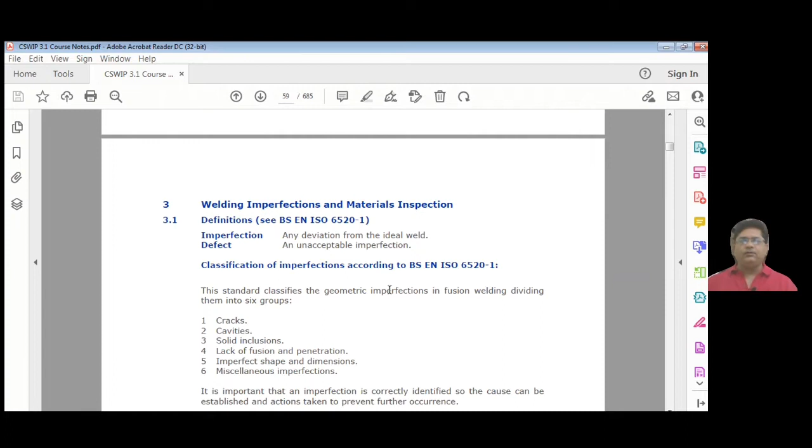A defect is any unacceptable imperfection. So you will be talking in terms of imperfections and defects. You will come to your boss or supervisor or QC engineer and say, I saw a defect and I need to do inspection more closely, can you help me? As soon as you say defect, he will understand you are talking about an unacceptable imperfection. So in your mind, and in your report, you already know what you're talking about when discussing this with your senior or the welder.

So try to be as technical as possible, because we are learning this so it will help in our career and wherever we work. Classifications of imperfections as per 6520-1 exist because all imperfections cannot be the same. There are different kinds of imperfections and defects, as you will see as we go through this chapter, and how detailed it is. These include cracks and cavities.

Cavities are basically voids. Inside, when you encounter an object and start cutting it, you can see there are many gas pockets or something like that. These cavities are like a tooth cavity, meaning there is a hole inside. That explanation is in general English.

Solid inclusion is something which is inside the item, embedded. You can understand it like seeds inside an apple — they are the solid inclusion. If you understand the apple as a metallic object, then the seed is the solid inclusion.

Then lack of fusion and penetration. When welding is happening, if the fusion of the welding joint is not done properly, you will see a straight line, or part of the bevel or steel not melted properly — that is a lack of fusion and penetration. Penetration problems occur when the root is not penetrated properly, generally on the root side.

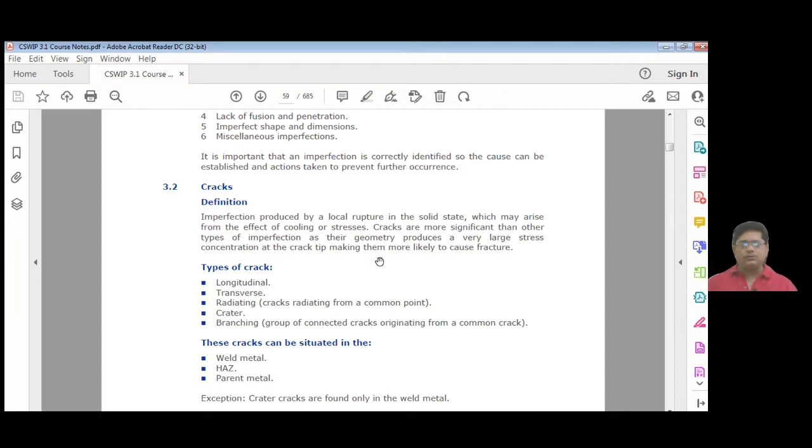So there are types of cracks: longitudinal cracks, transverse cracks. When we talk about longitudinal and transverse, we are talking relative to the welding joint - longitudinal to the welding joint, transverse to the welding joint - and radiating cracks, radiating from a common point.

There will be one point where the stress is so high that the crack started from there, which we call the initiation point. From there you can see branches going out. If the grain boundaries are affected on all sides or one side, then the crack starts from the grain boundary and you will see it branch.

Then there's crater crack, which you can see if you are not doing proper welding. Then branching - as I said, the branches are like tree branches connected to the crack - and usually we do many things to repair such cracks.

So let's try to cover these in our topic. These cracks usually happen from the weld metal. That's why I said longitudinal to the weld metal, longitudinal to the HAZ, and longitudinal to the parent material, or transverse to these three.

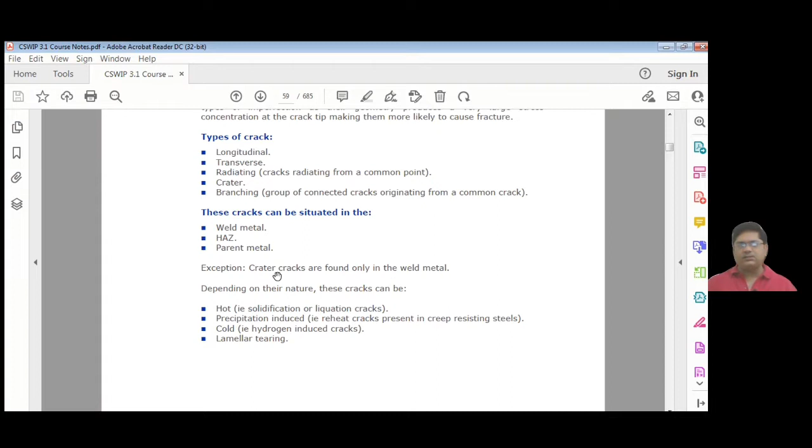Okay, but then let's proceed. Exception: crater cracks are found only in the weld metal. Naturally, crater crack is a problem of welding, so naturally it will come from the welding material itself, I mean the welding joint itself.

So depending on the nature, the cracks are either hot - which we call solidification or liquation cracks - or precipitation induced, that is reheat cracks present in creep resistant steels. So in creep resistant steel, we will find the precipitation induced cracks.

And also we'll find cold cracks, which are hydrogen induced cracks. For example, we have done the welding and the welding is done in a hydrogen rich atmosphere. Then you will see, after 48 hours or after 24 hours, hydrogen is actually escaping from the joint and getting trapped somewhere, and that causes a cold crack.

Then you have lamellar tearing, which I explained needs lamination checks to identify. Lamellar tearing defects are embedded in the steel during rolling, so when you are doing the cutting, you cannot see them - they may be a little bit inside. But when you put a joint and start to weld, this tearing will delaminate from the steel, and it will cause a crack because of the stress involved in the joint.

Let's see one by one, so that we will understand these concepts very clearly. Depending on the location and mode of occurrence, hot cracks can be solidification cracks, occurring in the weld metal, usually along the center line of the weld, as a result of the solidification process. One example is shown here.

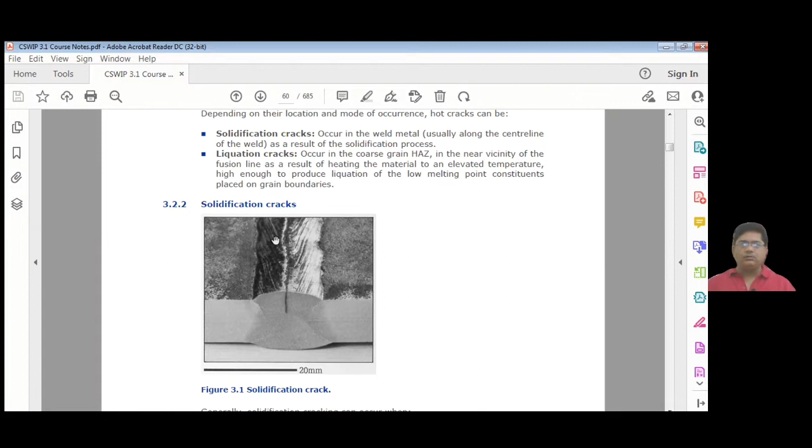You need to imagine and observe this carefully, because let's say for example you're not going to the site and you have not seen this. Usually it can be seen, but if you have not seen this, at least when viewed in the radiograph, probably you can identify it. These are also very tight cracks - many radiographs will miss this, but UT for sure will catch it very properly.

So solidification cracks occur during the process of welding as a result of the joint configuration, stresses, or improper welding technique.

The liquation cracks occur in the coarse grain. So when you talk about liquation cracks, these usually occur in the grain boundaries of the HAZ area. So you will see something in the HAZ area that will not be a solidification crack, but will be a liquation crack. Liquation cracks happen when welding is occurring, the grain boundaries are stressed, and if there is any problem there, it can simply start cracking from there as well.

Those are the things an inspector usually studies in CSWIP before coming to the site. Along the way, you may not encounter this because if the site is very big, something may have happened somewhere. If something like this happens, a QC inspector is supposed to be very inquisitive - asking his supervisor why it happened, how the repair was done, and what the root causes were. You need to go into very deep detail, because it may happen on your site under you, so at that time you need to know exactly how it was rectified and all that.

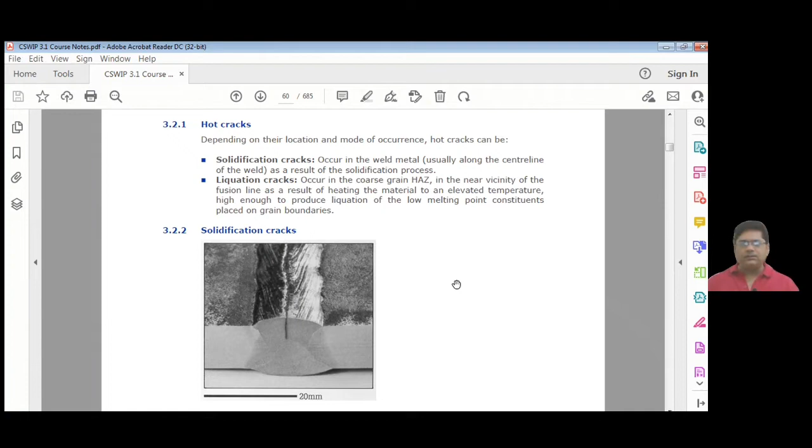Usually it will not happen in steel. I've rarely seen this happening in new building, but it may happen, and that's the reason it is given here as one of the causes of crack.

Generally, solidification cracks can occur when weld metal has high carbon or impurities like sulfur content. So, for example, you're doing welding with higher carbon content in an impure environment. The environment where the fit up is made is not good, because maybe the fit up is made in a large vessel, usually happening deep down in tanks or places where it's very difficult to maintain cleanliness and everything.

So in such cases, usually in workshops, it may not happen because the workshop environment is usually very clean, and such impurities like sulfur and all won't cause you any problem.

Then, as I said, depth to width ratio of the solidifying weld is too large, deep and narrow. So if the width of the joint is too wide with respect to its depth, or sometimes the depth is too much with respect to the width, that can also cause the problem.

Because many times these kinds of problems, the engineering and welding engineer will try to fix during the drawing stage itself. So depending on the thickness, the depth to width ratio of the joint, when the welding engineer goes through the drawing, he will usually identify this as a problem if we want to weld with SMAW, GTAW, FCAW, or SAW. So he will usually tell engineering to keep that kind of joint width ratio.

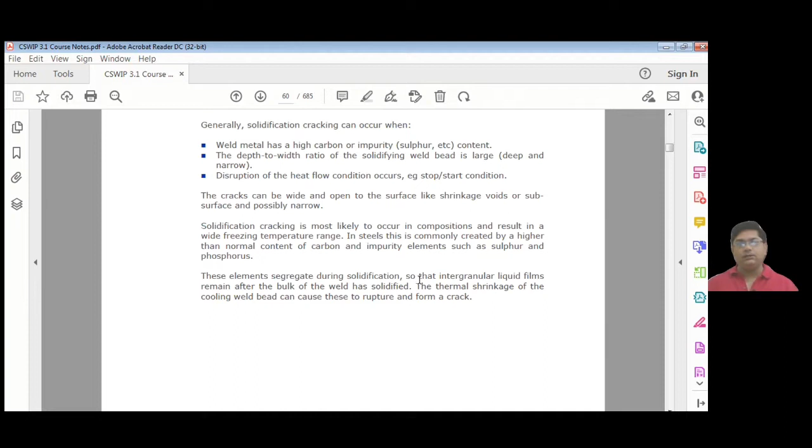There is a wide range of applications for S420, S690, and beyond. Usually jacket legs, the jack-up rig legs, are made of 690 material, and this is very high technology, highly mature, and advanced welding. Maybe someday I will try to cover that in a different topic.

So you can see a diagram of solidification cracking here. A sulfur-enriched liquid film forms in the center because when the whole weld is in the molten phase, the sides, being cooler areas, start cooling first. Both this side and the bottom side start cooling first, while in the center the molten layer is still there and cools last.

So if you have impurities, what happens? These impurities get pushed from the side boundaries to wherever it is still molten. The impurities hang around the molten area and get pushed because they are not getting solidified. Once pushed, usually from both sides, they accumulate in the center.

Then solidification happens, and if you just grind a little bit, you will see that this is already there as an impurity and crack. You can also catch it, though rarely, in the radiography film, but you will still see it because the impurities show up in the film, and then there will be a line, so you can easily identify this.

So any QC inspector should not try to ignore it if there is some crack or something that happened at the site. It rarely happens, and not all inspectors are involved, but at least they should know what kind of crack it is.

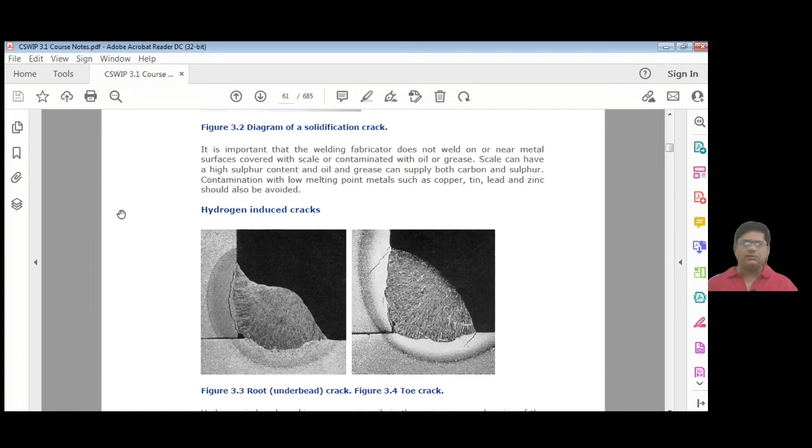So you can see the hydrogen induced crack has happened here in the heat affected zone, and here it has happened in the heat affected zone as well, because of the stress involved, since both sides are pulling. Naturally this side also is showing a little bit. It's a typical fillet joint, if I'm not wrong, because there is a gap here.

Many times the gap is very small, and that's the reason the stresses involved become higher, and then there is a problem. So for the fillet joint to be proper, there are minimum gap requirements given in the code. For example, DNV will say it should be at least 1.5 to 2 mm, to take care of the stresses involved in the fillet joint.

Then there is a fillet joint welded from a thicker member to a thinner member. So one has to understand that as well.

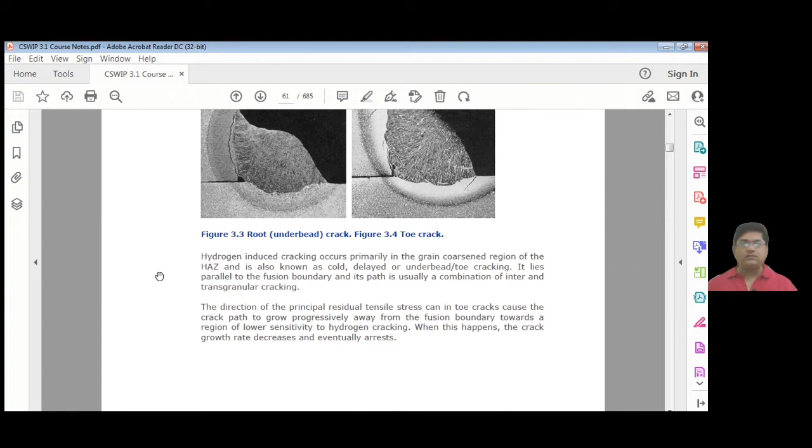Hydrogen induced crack occurs primarily in the grain coarsened region of the heat affected zone. So one of the deadliest cracking mechanisms identified in our industry is hydrogen induced cracking.

If you have time, go to YouTube and search hydrogen crack experiment. You will find a video where the person welds different kinds of electrodes, like 6010, which is high in hydrogen, then low hydrogen like 7016, 7018, and other cellulosic coated electrodes on small specimens, then keeps them in mineral oil for at least 1 to 2 days. In that video you can see how the hydrogen gas escapes from the weld joint. It's very exciting to watch, and I don't know if because of copyright issues I can show it in this video, but I'll try to find some video and post it along with this one. I think people should do their own search, not depend on others to spoon feed them, because it's a very exciting topic.

So there you can see how even lower hydrogen electrodes still give out hydrogen. It doesn't mean that low hydrogen means there will be no gas escape at all. Hydrogen will be there and it will escape. The only thing is how you manage this properly, by giving proper heat and not suddenly cooling it, so as to allow the hydrogen to escape from the weld.

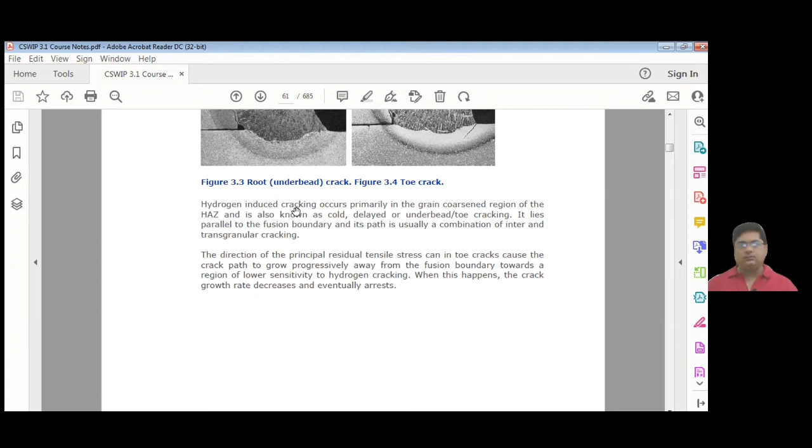So delayed underbead toe cracking lies parallel to the fusion boundary, and its path is usually a combination of inter and transgranular cracking. The grain size from the colder region and the grain from the hotter region of the HAZ, if these grain boundaries are of different sizes and not aligned to each other in a soft fashion, obviously there will be stresses involved, and it will start from the bigger grain size boundary.

Because why are they saying bigger boundaries? Imagine you have a lot of footballs and a lot of golf balls. The golf balls go below the football and you cannot see them, right? But in between four footballs, if you put one golf ball or a table tennis ball, it easily fits there and gets stuck. It will not be able to escape.

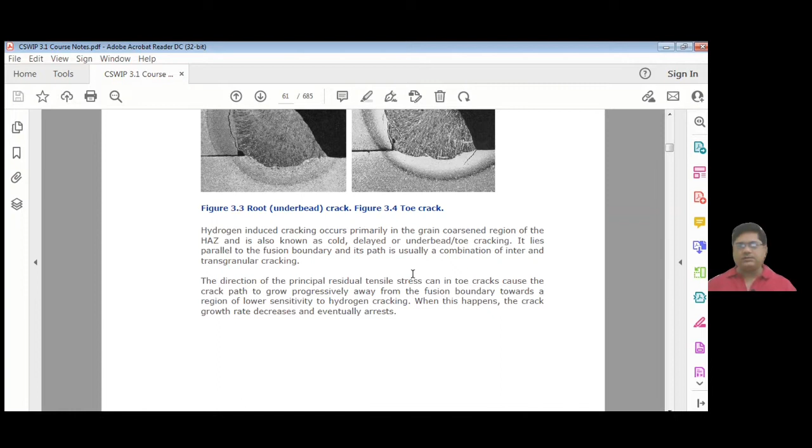The direction of the principal residual tensile stress can cause the crack path to grow progressively away from the fusion boundary towards regions of lower sensitivity to hydrogen cracking. So from where it is entrapped, it tries to escape through the less sensitive area. When this happens, the crack growth rate decreases and eventually arrests. He's explaining the conditions under which hydrogen will escape without getting stuck somewhere.

So the 4 factors necessary to cause hydrogen cracking are: the hydrogen levels. Primarily your electrode - if you are using a higher hydrogen electrode for some reason, you need to understand that your electrode has high hydrogen content, and you need to properly give the preheat and post heat so that it will be removed.

Usually we are using very low hydrogen electrodes - 4 ml per 100 gram electrode. For 7016 we are using -1, which is 4 ml I think, if I'm not wrong. It's very low, so the chances of hydrogen coming from the electrode are very minimized.

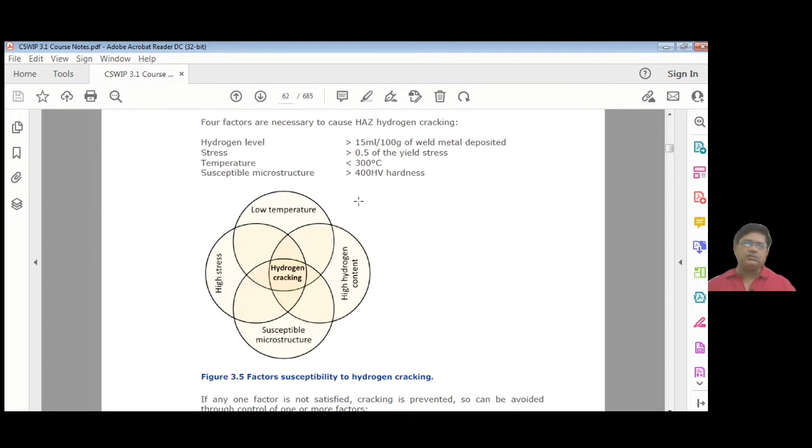So you can see this when temperature, stress, susceptible microstructure, and also the hydrogen content all come together, you will have a very high chance of hydrogen cracking.

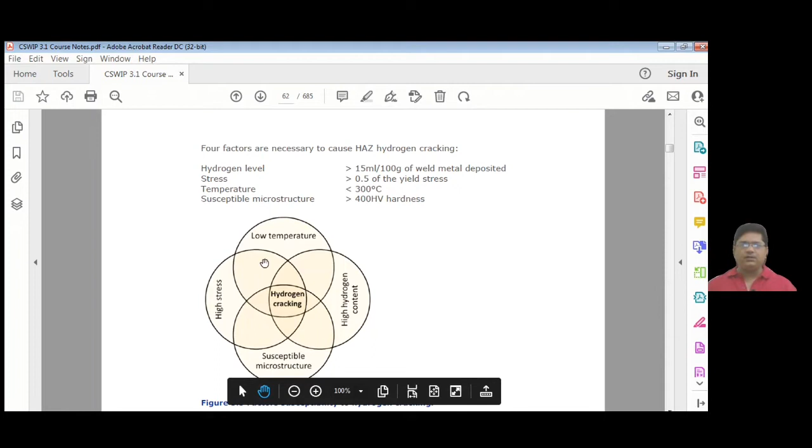Let's move from here. I think you should take this, cut it out, put it in different colors, and put the hydrogen in red color, and then put it on the notice board for everybody to know. Because otherwise, this material which we are studying will remain in these books, and if it is not coming out, it will not help the welder, fabricator, welding foreman, welding supervisor to understand these concepts. If they understand this better than you, then you are not required. So our whole life should be engaged in enriching the knowledge of welder, fabricator, foreman, so that if they know the dangers, the QC inspector's life will become much easier.

So if one factor is not satisfied, cracking is prevented, and that can be avoided through control of one or more factors. Apply preheat, slow down the cooling rate, and thus avoid the formation of susceptible microstructure.

So preheat, post-heat is required wherever it is needed. Usually you will not decide this, the welding engineer will decide that, and then you have to just implement the WPS. You have to see that it is done or not at the site. Welding inspector is not making any kind of decisions of this nature. It comes from the welding engineer, because he's a technologist. He will study the technology, he knows the material, he knows the metallurgy, and then he will build the WPS. And for that, he knows where the preheat is required, where it is not required.

So an alert QC inspector can read all this and read the mind of the welding engineer, so he knows what the welding engineer really wants him to do at site. Think about it like this, and it will be easier for you. Even though the QC inspector may be a BE engineer himself, in BE engineering they are not teaching you that kind of deep concepts of welding. This is usually done in a different kind of course where the welding engineer learns this and implements it. Welding engineer course itself is completely different from BE engineer. So a BE engineer should not think that because I am a mechanical engineer I can understand all these concepts easily. No, welding metallurgy is a different subject. Don't try to play with welding metallurgy yourself, and always try to implement the WPS. That is what is required from the welding QC inspector.

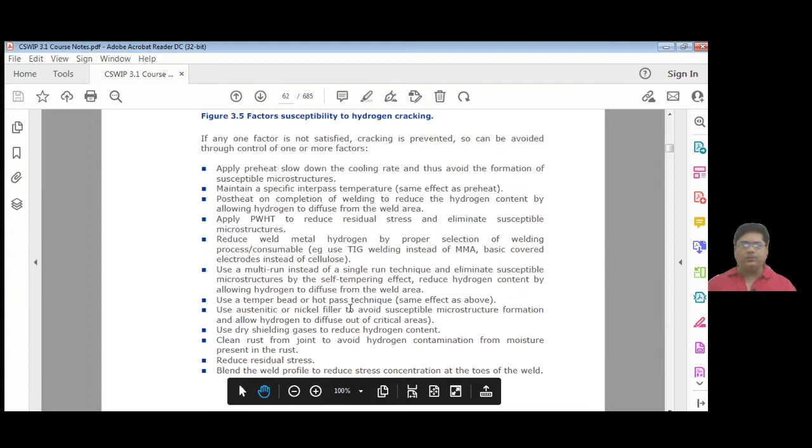Then use a temper bead or a hot pass technique, that's what I had said. Temper bead or hot pass technique - these kinds of welding techniques will help reduce the problem.

Then use austenitic or nickel filler to avoid susceptible microstructure formation and allow hydrogen to diffuse out of critical areas. So this is also decided by the welding engineer, what kind of filler material is to be used, and it's made part of the WPS. Then use dry shielding gases to reduce hydrogen content.

So when the gas is given, you need to always check the moisture content in the gas, the purity, and the material certificate of the gas - you must check.

So clean rust from the joint to avoid hydrogen contamination from moisture present in the rust. Rust is a very bad place - for example, there is a joint which is fit up, and 4 or 5 days there is no welding, and during that time if it's a raining kind of environment, then naturally there will be rust formed in that joint.

Then that rust, sometimes you can see the rust in the form of a red color bloom, and many times you may not see it, but there is such rust which is very, very difficult to see because it has just formed in 1 or 2 days only.

So you must insist that once the fit up is released, welding should start immediately. Or if you want to give 3 days, 4 days, 5 days, then the welder must clean the joint and re-show it to the QC inspector, then he should start the welding.

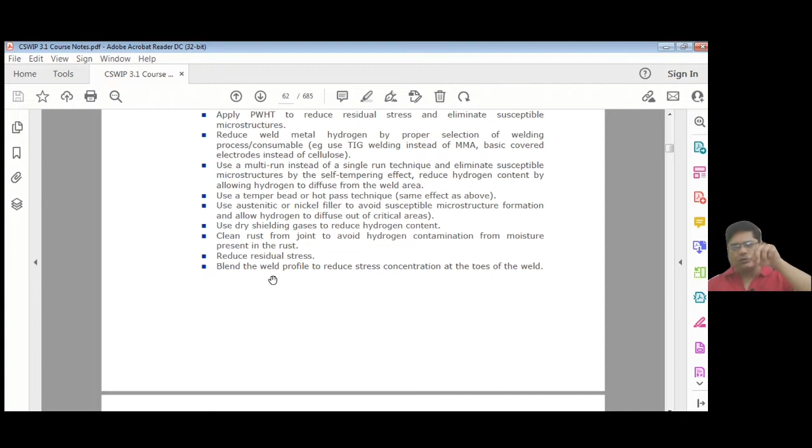And then we are using a 25 paise coin or 1 rupee coin to check the toe blending, or even you can use the washer of the stud and nut. That washer also is circular, so you can use that and see how smooth the toe blending is.

Lamellar tearing, as I explained, when in the joint lamellar tearing can happen, there if you do lamination first, then do the joint, you can avoid that. So lamellar tearing can occur on the rolled steel products primarily plates.

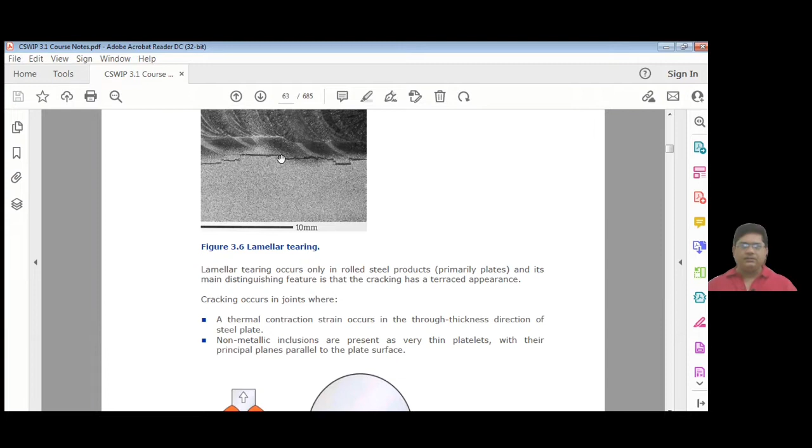So cracking occurs in the joint where the thermal contraction strain occurs in the through thickness direction of the steel plate. This is why in many places where jacket construction is done, critical structures, Z grade material is used.

Z grade material means when rolling is happening in the thickness direction, the plate is already tested in that direction. For Z grade testing, you can send any specimen, mentioning the rolling direction, to the lab. They will do the pull test to identify if the material is sound or not, and if not sound they will tell you it has failed. So you need to do UT and confirm there are no inclusions in this material.

The diagram of lamellar tearing shows contraction strain imposed on the planar non-metallic inclusion results in progressive decohesion to form the roughly rectangular holes, which are the horizontal parts of the cracking parallel to the plate surface. The English description here is a bit complex for people to understand.

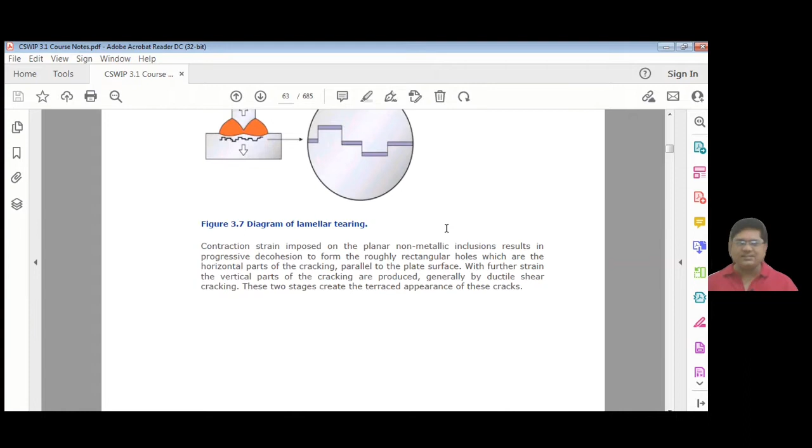As mentioned, it is perpendicular to the joint, like a T joint. If this material has some problem here, naturally the stresses work in opposite directions and it will crack. These two stages create a terraced appearance on the crack surface, which is what this appearance shows.

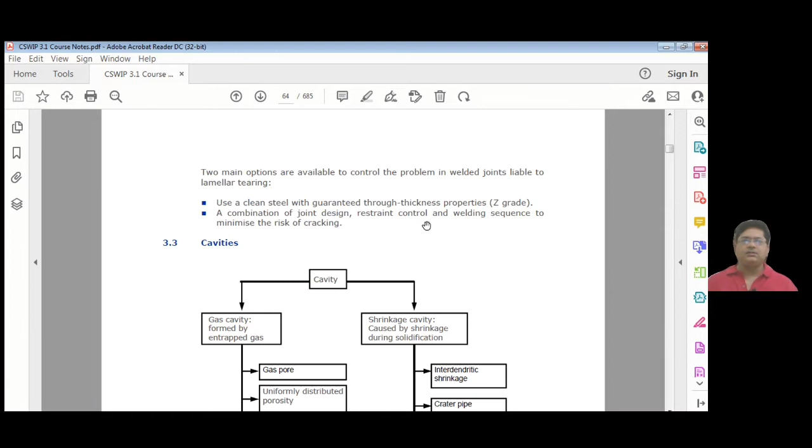Two main options are available to control the problem in welded joints liable to lamellar tearing. Use a clean steel with guaranteed through thickness properties. How does this happen? From the engineering itself.

When the engineer does the design, he will tell you where Z grade is required. For example, in a general arrangement drawing of the jacket, at least one drawing will mention the areas where TKY joints usually occur, which require that kind of property.

So let's see cavities. A cavity is like a void; a gas pocket is also a cavity. Cavity is divided into two different types: one is the gas cavity formed by entrapped gas, and shrinkage cavity caused by shrinkage during solidification. So you may have an entrapped gas pocket due to lack of proper cooling, or a place where it is shrinking because of the weld solidifying. At that time, a shrinkage cavity can occur there.

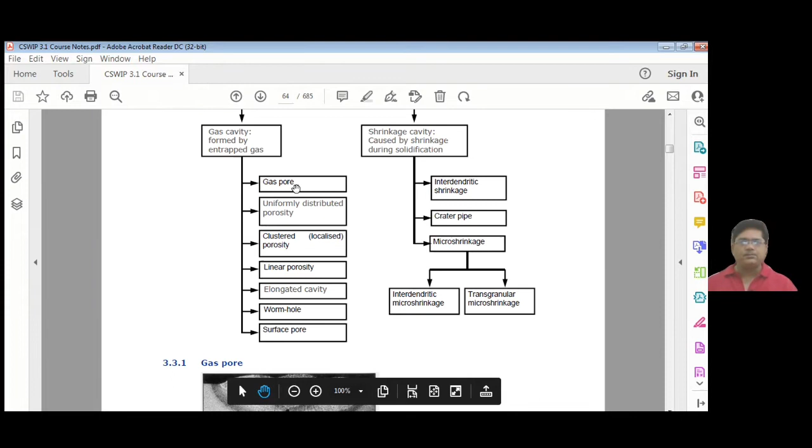Coming back to the gas, the types of cavities are gas porosity, uniformly distributed porosities, because porosities come from air. If there is wind in the climate and weather, you will see a lot of gas porosities, and cluster porosities can come because the wind is swirling around. Then linear porosity, if that wind is very bad.

Elongated cavity, wormholes, are just like a long porosity caused by air. If your weld metal shielding is getting disturbed by wind, and then dust, naturally these kinds of things will come into the weld joint, and it will show in the radiograph when you are doing the RT of the joint.

What about the shrinkage cavity? The interdendritic shrinkage - interdendritic means the grain boundaries. In these grain boundaries there can be shrinkages. Then crater pipe - crater pipe is also caused by wrong welding start and stop techniques. During that time a crater crack can occur in the joint, and it looks like an elongated crater, like a pipe.

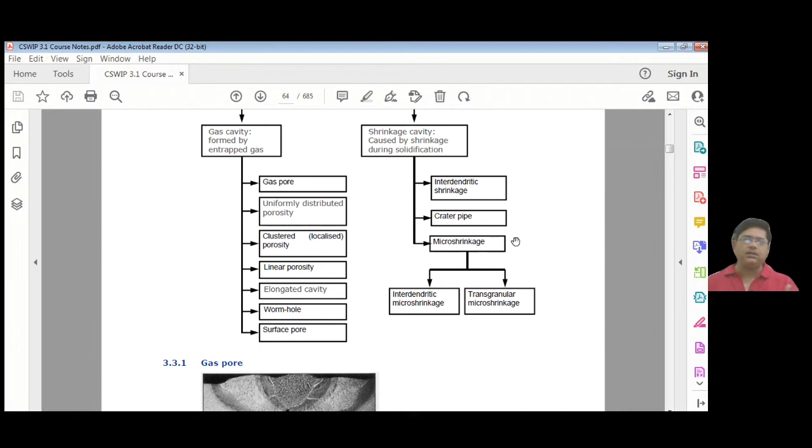Micro shrinkages are grain boundary issues which occur during solidification of the weld metal - the shrinkages happen at the grain boundaries, and that can cross this. So you can see micro shrinkage at the grain boundaries, and transgranular shrinkage, when a group of grain boundaries are shrinking.

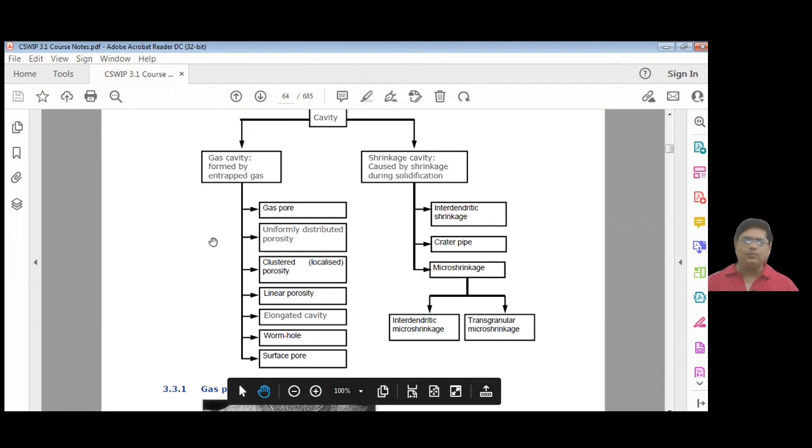Mostly I have seen very few of these kinds of things. I can see craters happening, no doubt, but porosity is very, very widely occurring. On the left side, this is almost 70-80% of the job you will see, and very rarely will you see shrinkage cracks and all that.

So you can see the gas porosity - in the joint radiography it will come as a dark color. A gas cavity is of essentially spherical shape, trapped within the weld metal.

Gas cavities can be present in various forms - isolated means one or two distributed in the 15-inch section, or it can be aligned, or clustered. So uniformly distributed, clustered linear porosities in a line, elongated cavities, surface porosity - everything can be there. You can also see surface porosities many times, and during MPI you can spot them during the dye penetrant test also.

If you see the acceptance criteria of ASME, AWS or ISO standards, you will spot diagrams given there, and photographs, and that is exactly what we have to compare when we are watching the radiograph - we compare the drawing and then we know what is linear, what is distributed, what is clustered. There are dimensions given, so based on that you need to identify them.

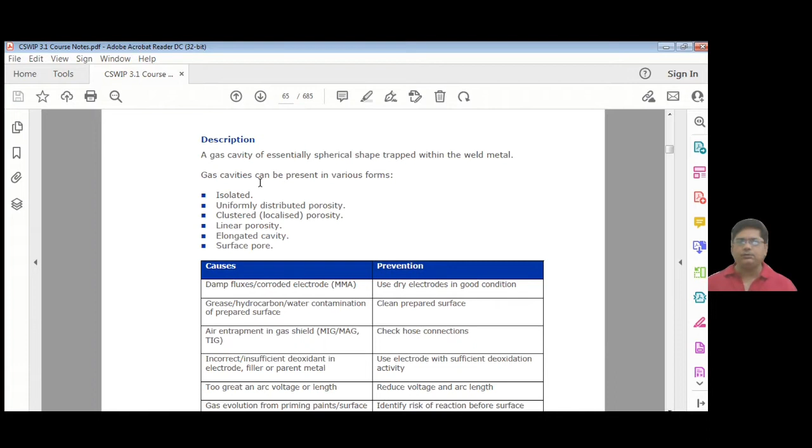So what are the causes? Damp fluxes, corroded electrode - if the electrode is not of good quality, you may pick up this kind of problem. So use a new, fresh electrode, check the electrodes properly, and they should be in good condition.

Grease, hydrocarbon, water, contamination of the prepared surface. I told you in the fit-up, so many problems are there - that is, if it is unclean, then you will know that porosity can occur on the job.

Air entrapment in gas shield. If you are using gas as a welding gas shield in the welding equipment, that can naturally be a major cause of entrapment. For example, MIG-MAG welding naturally uses CO2 gas, so the gas can get entrapped. Check hose connections, leakages, and the flow - the flow should be proper.

Incorrect or insufficient deoxidant in the electrode, filler, or parent material - use an electrode with sufficient deoxidation activity. So the welding engineer should check the MTC, and only then should he approve them. Too great arc voltage or length - reduce the arc voltage and length, since if this voltage is beyond the WPS range, it can happen.

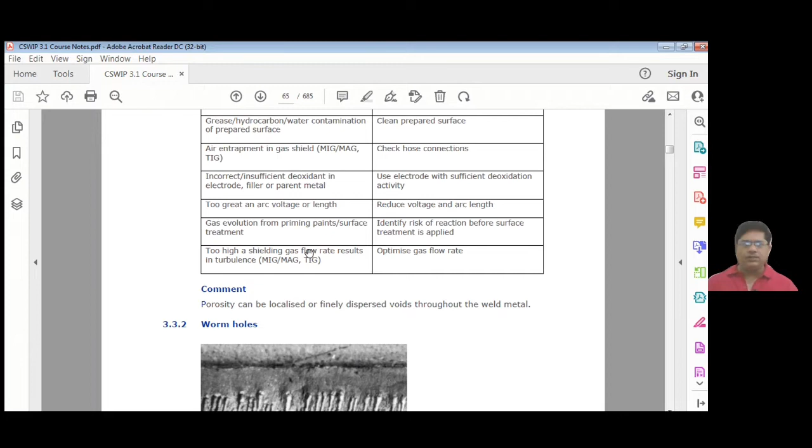Gas evolution from priming paints and surface treatment - at many sites, they do priming of the job, meaning a primer coat, or they may use a weldable primer. If that weldable primer thickness is more than 25 microns, you may have this kind of problem during welding - it will create porosity. So the thickness of the weldable primer should be below 25 to 30 microns, a thin film, so that welding is done properly. Also, too high shielding gas flow rate - as I said, the flow rate also has to be checked.

One important thing they have not discussed is that gas cavities can also occur in high wind environments, but I think they have not considered that as a point.

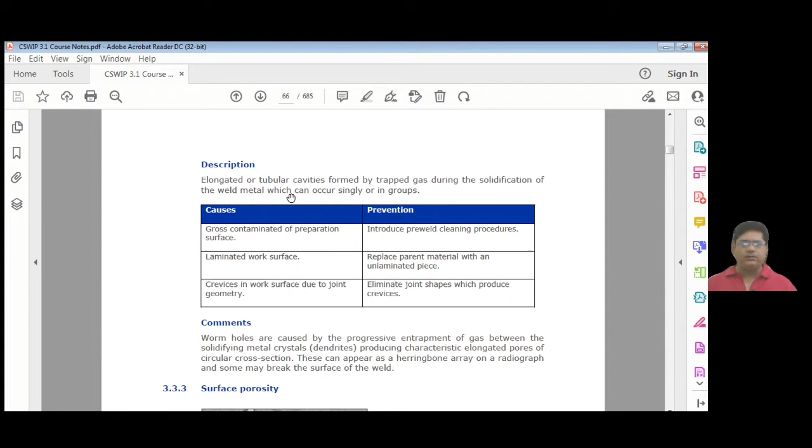Then wormholes - you can see the typical description here. These are the wormholes, and why do they occur? Elongated or tubular cavities formed by gas trapped during the solidification of weld metal, which can occur singly or in groups. So you will learn a lot of things.

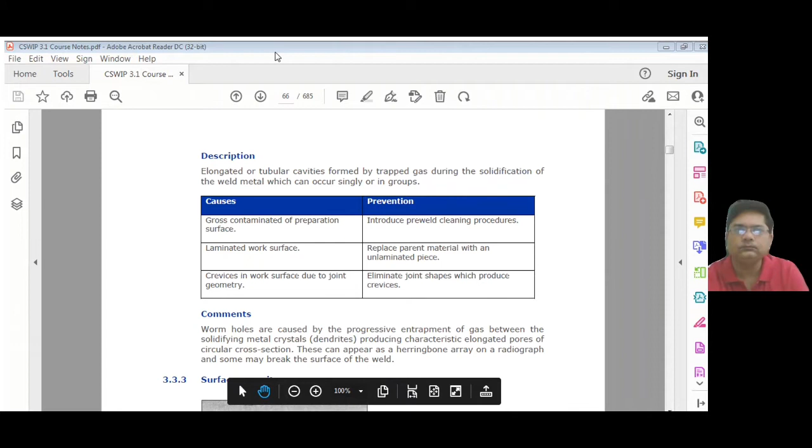Let me check if the sharing is going on. Okay, let's restart this. So description of the wormholes, causes and prevention. Gross contamination of preparation of the surface.

Prevention you can do by better cleaning. Laminated work surface - replace parent material with an unlaminated piece. So laminated work surface means the plate itself is having lamination.

Then crevices in the work surface due to joint geometry. So you need to avoid the crevices. As much as possible, the joint should be linear, like a straight line. And if there is any joint where multiple joints are coming and joining, then naturally the welding engineer must become alert, and he will try to do a better welding sequence for that kind of joint shape.

Comment: wormholes are caused by the progressive entrapment of gases between the solidifying metal crystal dendrites, the crystal grain boundaries, producing characteristic elongated porosity with circular cross section. So it looks like circular porosity and elongated.

You will see this in very critical joint surfaces where there are multiple joints coming and meeting, and that is a place where this can happen. This can appear as a herringbone array on a radiograph, or some may break the surface of the weld. In the radiograph, you will have to see this as very long arrays.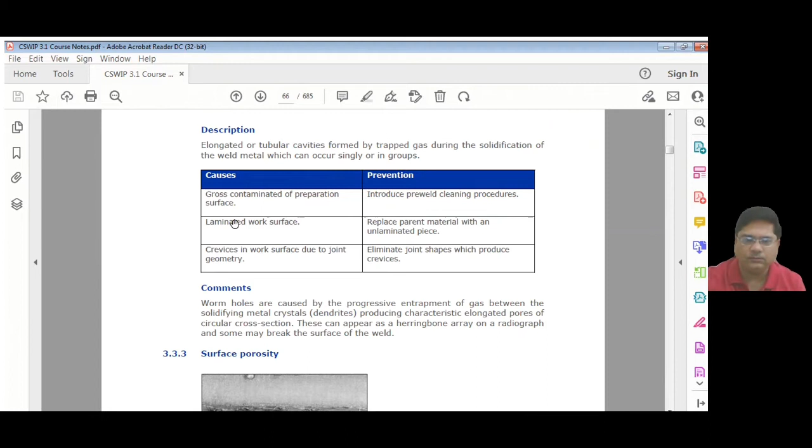Surface porosity - it can be open to the surface and it can be seen like this. So surface porosity is the porosity or gas porosity which has opened to the surface. Why does it happen? Again, same damp surfaces and contaminated surface. Clean surface and dry electrodes are required for preventing that.

Low flux activity - so in MIG-MAG welding, flux core welding, the fluxes are very less, not properly distributed. Then this can happen. So you can use a high activity flux. If something like this is happening at the site, you can immediately tell the welding engineer, and he will identify this as a problem of the flux.

So excessive sulfur, particularly free cutting steel producing sulfur dioxide - use high manganese electrode to produce manganese sulfide, MnS. Note: free cutting steel with high sulfur should not normally be welded. That's what this is - again, a welding engineer area. If he sees such material in the MTC, then naturally he will get active and he will say that this will cause problems in welding.

Loss of shielding gas due to long arc or high breeze environment - that is improved by putting up screens, and you need to prepare the screens in advance and keep them ready. When the winds are there, you need to put them at various places where the welding is happening. Shielding gas flow rate that is too high results in turbulence, and because of that turbulence, there is also pickup of these kinds of gas porosities.

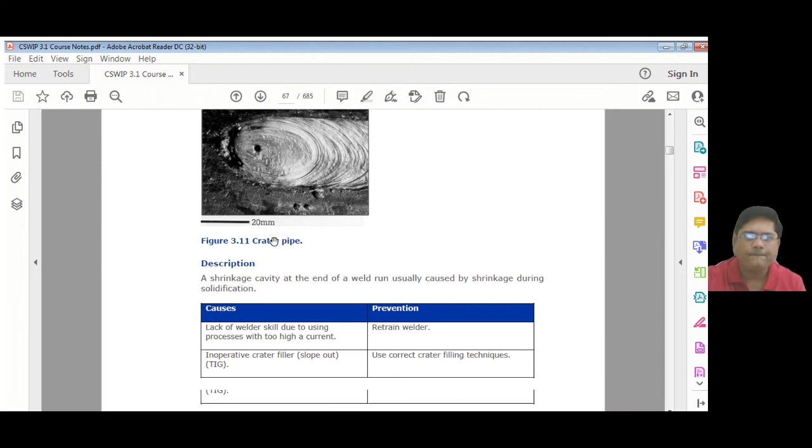Let's come to crater pipe. This is how it looks - you can see only the opening in the surface, but it's actually a little bit elongated inside, and that's why it is called crater pipe. Pipe means the length of this looks like a pipe with a hole like this. Usually it's very small, 10mm, 12mm, 20mm. You can see the diameter size is also very less, maybe 1mm, 2mm diameter max.

Shrinkage cavity at the end of the weld run, usually caused by shrinkage during solidification. So lack of welder skill, due to using the process with too high current, can result in this. How can you catch this? If the welder is welding with high current, you will know that he is going to end up with crater pipe. So you have to retrain the welder and say that he has to weld within the WPS parameters.

Inoperative crater filler, so slope out - this is a TIG technique actually. When you are doing TIG welding, if proper technique for inoperative crater filler is not used, naturally he will end up doing crater cracks, and in the crater pipe he may be able to produce this.

Crater filling is a particular problem in TIG welding due to its low heat input. To fill the crater, it is necessary to reduce the weld current in a series of descending steps until the arc is extinguished. So you will see when he is about to end the job, he will slowly do a certain technique which will reduce the heat, finish the job, and then extinguish the arc.

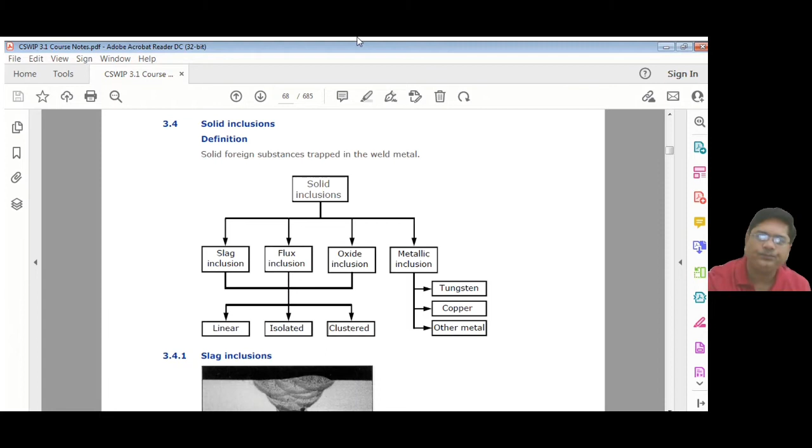Flux inclusion can be linear, isolated, or clustered. Slag inclusion, you can see the slag inclusion in this radiograph, I think he has given.

Let's talk about this. Slag trapped during welding has an irregular shape, so it differs in appearance from gas porosity. So to identify slag is very difficult because it will not have a regular shape. Usually it will be irregular in shape, continuous, and very difficult to predict.

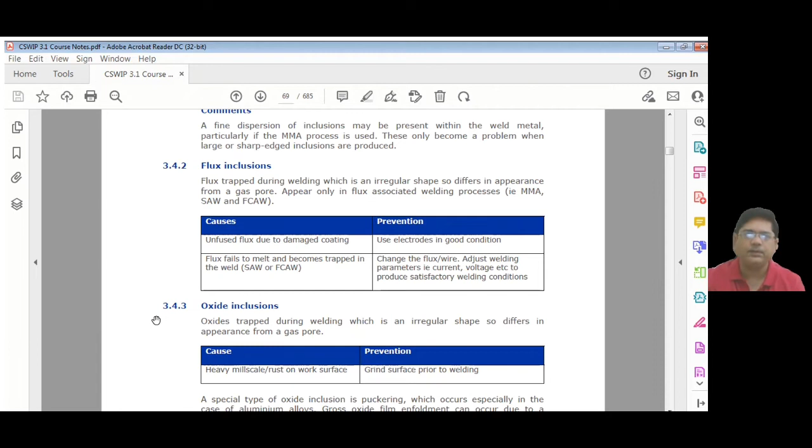इससे फ्लक्स को जब बेक करता है तो उस टाइम पे आपको ध्यान देना है कि टेम्परेचर बराबर है कि नहीं। और अगर फ्लक्स का ऊपर में बेक कर रहा है तो ऊपर का टेम्परेचर, नीचे का टेम्परेचर, बीच में का टेम्परेचर आपको देखना चाहिए, क्योंकि जब वो ऐसा इनग्रेडिएंट बन जाता है तो इसमें फ्लक्स हम लोग नीचे से निकाल के ले लेते हैं ये समझ के कि वो गर्म है, हो सकता है वो ठंडा हो। तो नेचुरली ये जो सिचुएशन है ये सब बहुत ही बारीकी से हम इंस्पेक्टर को साइट में देखते रहना चाहिए।

Oxide inclusion. Oxide trapped during the welding, which is irregular shape, so differs in appearance from gas porosity. आपने देखा होगा स्टेनलेस स्टील का रूट अगर हम लोग बिना पर्जिंग के मारेंगे तो वहाँ पे जो ऑक्साइड बनता है काला कलर का, उसका बहुत ही इरेगुलर शेप रहता है। तो वो sort of looks like flux but different, is dark in color, but वो oxides रहता है। So heavy mill scale rust on the work surface के ऊपर अगर आपने वेल्डिंग किया होगा तो नेचुरली उसका अपीयरेंस ऐसा आ जाएगा वेल्डिंग के अंदर।

Special type of oxide inclusion is puckering, which occurs especially in the case of aluminum alloys - gross oxide film enfoldment can occur due to combination of unsatisfactory protection from atmospheric contamination and turbulence in the weld pool. तो aluminum alloys welding के time पे gross oxide film enfoldment हो सकता है कि ऐसा आपका gross oxide film बन जाए due to combination of unsatisfactory protection from atmospheric contamination and turbulence in the weld pool।

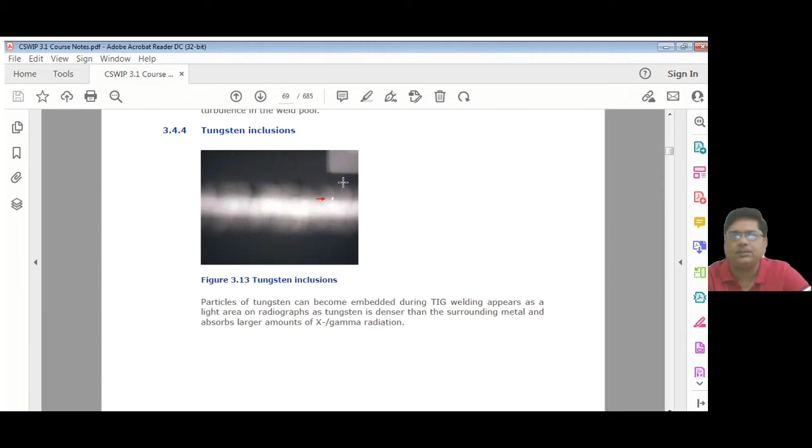अब ये जो रेडियोग्राफी है, इसमें आप देख सकते हैं कि ये जो लाइट एरिया है ये रूट पास है और ये जो स्पॉट है ये रूट पास के बाद कहीं तो भी ये आया हुआ है, जो लेफ्ट साइड में, अपर साइड में आया हुआ है। सो ये मिड कैपिंग के बाद मिड लेयर में होने का चांस है टंगस्टन का ये जो इंक्लूजन है। सो इसमें भी 1 mm 2 mm 3 mm, डिपेंडिंग ऑन द साइज इसको एक्सेप्टेंस क्राइटेरिया होगा कि ये एक्सेप्टेबल नहीं है तो फिर इसको आपको रिपेयर देना पड़ेगा।

पर ये सिर्फ टिग वेल्डिंग में देखा गया है क्योंकि टंगस्टन सिर्फ टिग वेल्डिंग में यूज होता है। Causes: contact electrode tip with weld pool, keep tungsten out of the weld pool, use high frequency start। So welder स्टार्ट करता है तो उसको हाई फ्रीक्वेंसी से स्टार्ट करना चाहिए, वरना क्या हो जाएगा उसका इलेक्ट्रोड कट के नीचे वेल्ड पूल में रह जाएगा। सो contact of filler metal with hot tip electrode।

सो द फिलर मेटल जो एसएस में यूज करता है एक हाथ से वो जो वायर यूज करता है, उसका जो हॉट, अगर वो हॉट रहेगा और वो इलेक्ट्रोड जो टंगस्टन का टॉर्च में है टंगस्टन उसके साथ टच हो जाएगा तो भी फिर वो टंगस्टन को डिस्टर्ब करता है, फिर वो टूट के नीचे गिर जाता है। सो avoid contact between electrode and the filler metal। सो अगर आपको ये जो फिलर ऐड करते जाता है वो टॉर्च से, हाई फ्रीक्वेंसी से टिग में, he will keep on melting it, so the filler little bit has to be away from that electrode।

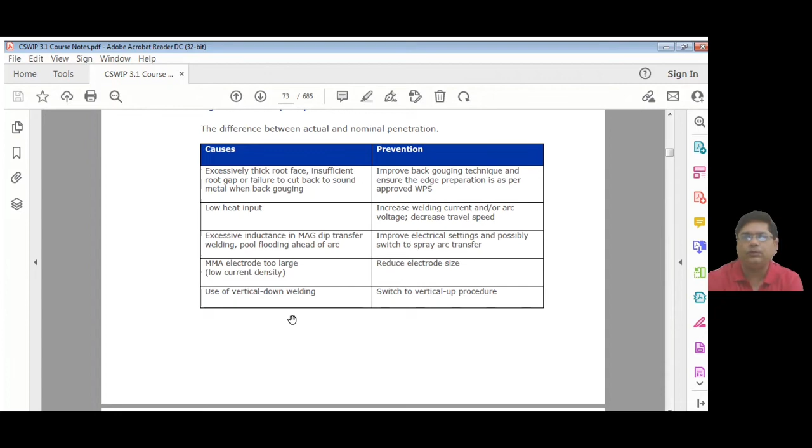Now let's see, in the joint if it's not critical nature then required strength is low, area is not prone to fatigue cracking, it's possible to produce a partial penetration weld. In this case incomplete root penetration is considered part of the structure and not an imperfection. This would normally be determined by design or code requirement.

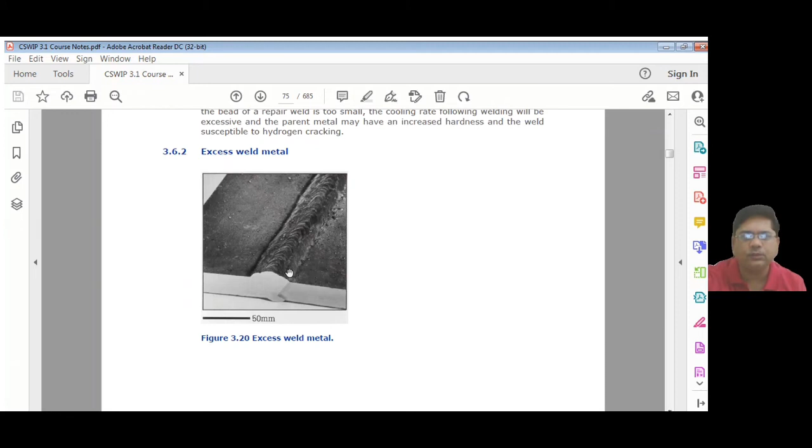और ये क्यों होता है, क्योंकि नेचुरली ये कॉन्वेक्स लेयर बनता है और उसके साथ मोर देन द कोड अलाउड अगर आपने वेल्डिंग किया है तो नेचुरली ये आएगा। हाई एनर्जी हाई करंट यूज़ किया है, शैलो एज प्रिपरेशन बराबर नहीं है, फॉल्टी इलेक्ट्रोड मैनिपुलेशन, इनकरेक्ट इलेक्ट्रोड साइज, ट्रैवल स्पीड बहुत कम है, इनकरेक्ट इलेक्ट्रोड एंगल, एंगल भी बराबर नहीं है। और रॉन्ग पोलैरिटी, पोलैरिटी भी बराबर से यूज़ नहीं किया रहता है, डीसी नेगेटिव। SMAW में डीसी नेगेटिव डीसी पॉजिटिव रहता है। अगर इलेक्ट्रोड पोलैरिटी डीसी नेगेटिव है तो ये आने का चांस है, तो पोलैरिटी पॉजिटिव होना चाहिए।

The term reinforcement used to designate the feature of this weld is misleading, since excess weld metal does not normally produce a stronger weld in a butt joint or in an ordinary steel. This imperfection can become a problem. Angle of the weld toe can be sharp, leading to increased stress concentration in the toe of the weld and fatigue cracking.

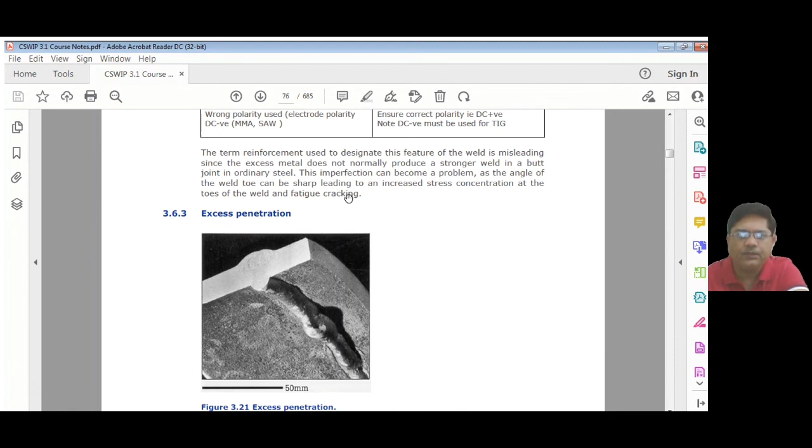तो क्या बोलता है कि reinforcement का ये मतलब नहीं है कि आप बहुत ज़्यादा वेल्डिंग कर देगा, तो ये यूजुअली एक्सेस मेटल है, बट ये फायदे का नहीं है। इट इज़ नॉट ऑफ एनी यूज़ फॉर द स्ट्रेस। इनफैक्ट वहाँ पे जो अंडरकट बन जाता है तो वहाँ पे स्ट्रेस कॉन्सेंट्रेशन हो जाता है कि फिर अगर कोई फेलियर होगा तो वहीं से वो फेल हो जाएगा।

इसलिए स्ट्रेस कॉन्सेंट्रेशन एरिया वी हैव टू अवॉइड इन दिस। एक्सेस पेनिट्रेशन आप देख सकते हैं, ये जो रूट में इतना ज़्यादा पेनिट्रेशन करके रखा है, यूजुअली हम लोग इसको बोलते हैं कि भजिया बना के रख दिया रूट में। सो इसी तरह ये दिख रहा है एक्सेस पेनिट्रेशन।

तो ये जो रूट एक्सेस पेनिट्रेशन ये नज़र आएगा, आरटी में भी नज़र आएगा, सिर्फ आंखों से देखेगा तो पता चल जाएगा। इसका मतलब बहुत हाई हीट इनपुट से मारा है, हाई करंट से। आर्क वोल्टेज और वेल्डिंग करंट को ठीक से मेंटेन नहीं किया है उसने।

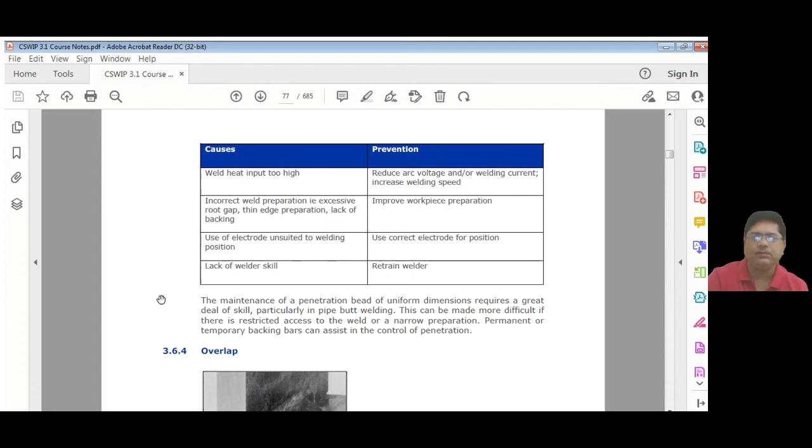इनकरेक्ट वेल्ड प्रिपरेशन भी हो सकता है, उसके वजह से ये हुआ हो। यूज ऑफ इलेक्ट्रोड अनसुटेड टू द वेल्डिंग पोजीशन। 90% ऑफ द टाइम बड़ा इलेक्ट्रोड से अगर आपने जॉइंट मार दिया तो ये बड़ा इलेक्ट्रोड बहुत हाई करंट और हाई वोल्टेज लेके आएगा, तो जॉइंट की जो थिकनेस और प्रोफाइल है वो मैच नहीं करेगा उसके साथ। अगर 2 mm के रॉड की जगह 4 mm का रॉड यूज कर दिया तो उसमें नेचुरली रूट में एक्सेस पेनिट्रेशन होने का चांस है। फिर वेल्डर स्किल भी मायने रखता है, वेल्डर स्किल भी इम्पोर्टेंट है।

आप ये देख सकते हैं कि ये जो फिलेट वेल्डिंग जॉइंट मारा है वो बिल्कुल ही सही नहीं मारा है, एक साइड में मारा है और एक साइड में कम फ्यूजन हुआ है। एक्चुअली बराबर से इसका लेग लेंथ देखेगा, एक साइड में कम है, एक साइड में उससे भी ज़्यादा है। तो लेग लेंथ भी अगर चेक करेगा इधर से इधर का बीच में, तो नज़र आएगा कि ये रॉन्ग एंड फॉल्टी वेल्डिंग है।

सो इसको ओवरलैप बोलते हैं हम लोग, क्योंकि ये जो कैपिंग आया हुआ है, ये यहाँ पे ऐसा ओवरलैपिंग करके की तरह नज़र आ रहा है।

पुअर इलेक्ट्रोड मैनिपुलेशन, हाई हीट इनपुट, यहाँ पे तो पूरा का पूरा टेक्निक ही गलत है। इनकरेक्ट पोजिशनिंग ऑफ द वेल्ड, रॉन्ग इलेक्ट्रोड कोटिंग टाइप रिजल्टिंग इनटू हाई फ्लूइडिटी। तो ये भी हो सकता है कि आपने गलत ही इलेक्ट्रोड यूज़ किया हो वेल्डिंग के लिए।

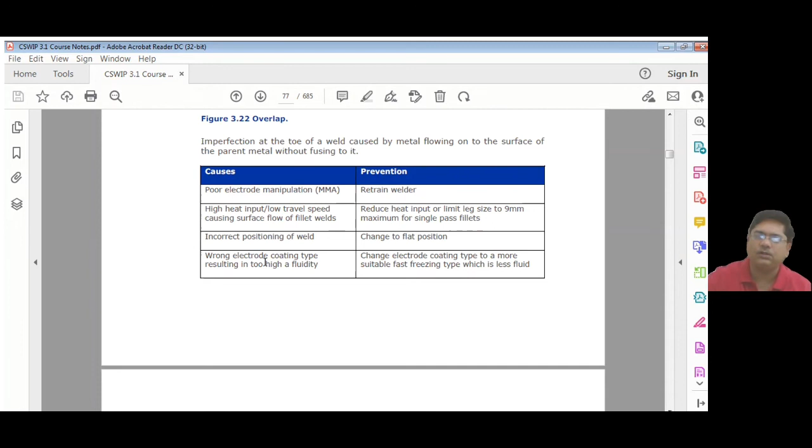फिर मिसअलाइनमेंट लिखते हैं, लीनियर मिसअलाइनमेंट। लीनियर मिसअलाइनमेंट आपने ऑलरेडी देख लिया, इधर ये जॉइंट देखते ही किसी को भी पता चलेगा कि इसमें मिसअलाइनमेंट है। दो बट मेंबर को ऊपर नीचे लगाया हुआ है और ये वेल्डिंग किसी भी तरह मार दिया गया है, तो इसमें बहुत सारा प्रॉब्लम आ सकता है लीनियर मिसअलाइनमेंट में।

इनएक्यूरेट असेंबली और प्रिपरेशन, डिस्टोर्शन फ्रॉम अदर वेल्ड्स, ये डिस्टोर्शन की वजह से भी हो सकता है कि बराबर से फिटअप ही किया नहीं हो। एक्सेसिव आउट ऑफ फ्लैटनेस इन हॉट रोल्ड प्लेट्स एंड सेक्शन। जो प्लेट्स अगर एकदम पैरेलल या प्लेन नहीं रहेगा, बहुत ऊपर नीचे रहेगा, तो ये आने का चांस है अगर बराबर से फिटअप नहीं किया हो तो।

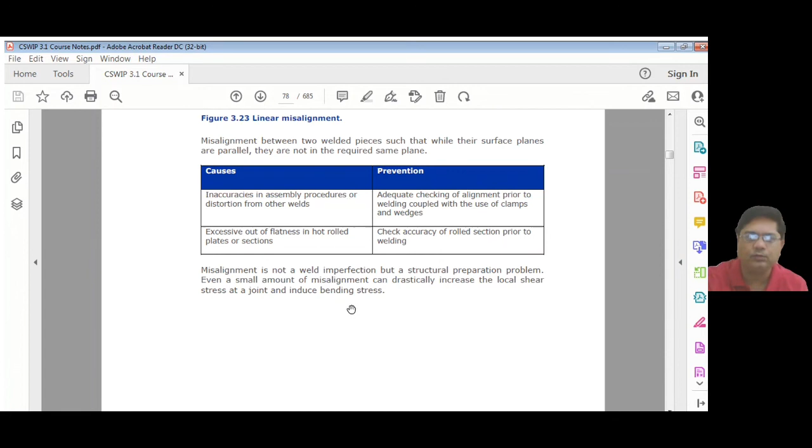ये फिर एंगुलर डिस्टोर्शन है, इसका मतलब वेल्डिंग हो जाने के बाद ये ऊपर नीचे हो गया बिकॉज़ ऑफ मिसअलाइनमेंट। टू वेल्डेड पीस सच दैट सरफेस प्लेन्स आर नॉट पैरेलल एंड इंटेंडेड एंगल, ये यूजुअली इंडस्ट्री में बहुत होता है। अगर आप स्ट्रक्चरल स्टील में देखेगा तो बहुत सारा मिसअलाइनमेंट्स, एंगुलर मिसअलाइनमेंट्स होता रहता है।

ये अवॉइड करने के लिए सोच समझ के फिटअप करना चाहिए, फिर वेल्ड का जो सीक्वेंस है बराबर से उस सीक्वेंस से वेल्डिंग होना चाहिए, कितने वेल्डर्स उसमें इन्वॉल्व होने चाहिए, ये सब पूरा का पूरा साइट में रहने वाले वेल्डिंग इंजीनियर को इन्वॉल्व होने के बाद ये मसला प्रॉपरली सॉल्व होता है, रिजॉल्व होता है। इनकम्प्लीट फिल्ड ग्रूव।

Incomplete filled groove is a continuous or intermittent channel in the weld surface due to insufficient deposition of weld filler metal. Naturally, if you don't fill it sufficiently, it becomes insufficient filling in groove welding. You can see here that almost very little has been filled, whereas it should have been filled up to form a proper crown here.

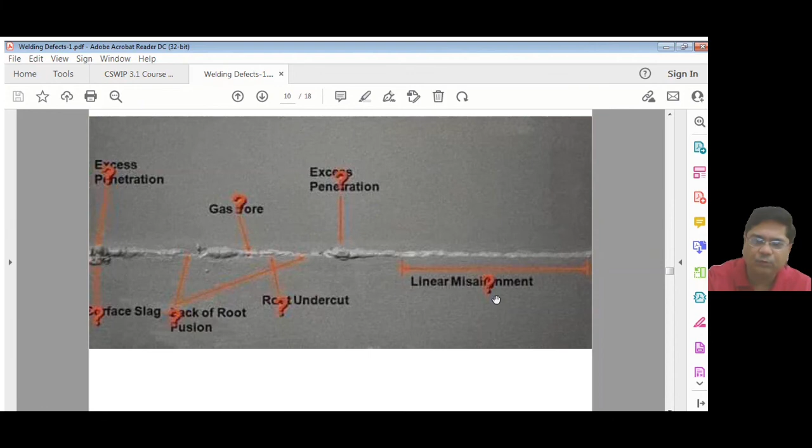आप देख सकते हैं पुअर स्टार्ट स्टॉप, एक्सेसिव रूट पेनिट्रेशन। इस स्लाइड को थोड़ा ज़्यादा देखना चाहिए, रुक के थोड़ा स्टडी करो। ये बराबर कैप मारा नहीं है, एक्सेस कैप हाइट है यहाँ पे, कुछ जगह पे फ्यूजन हुआ नहीं है बराबर से।

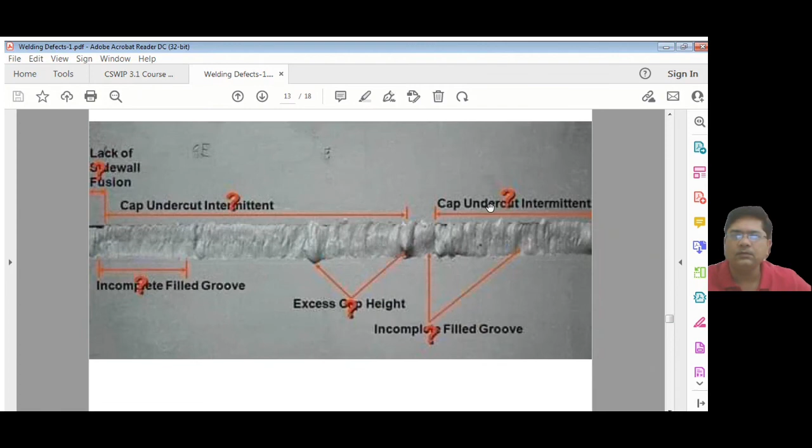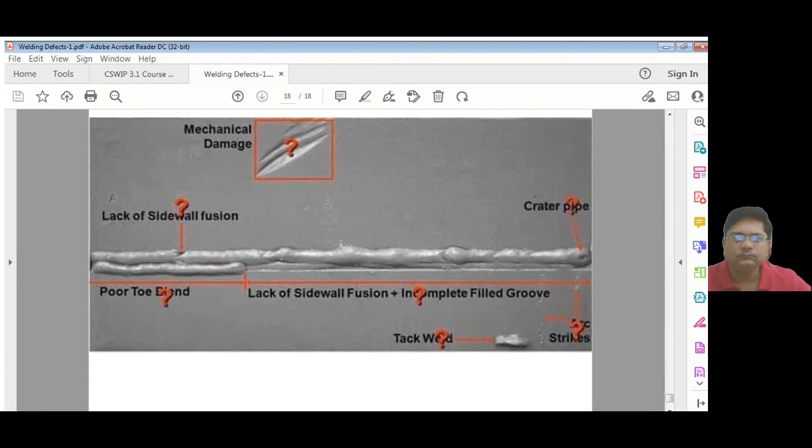फिर कुछ जगह पे मैकेनिकल डैमेज है, आर्क स्ट्राइक है, लैक ऑफ रूट फ्यूजन है, porosity, arc strike। That is the last one.

So come back to the burn through. आपको ये एग्जाम में मल्टीपल चॉइस में भी आएगा कि कॉजेस क्या है, और फिर जब आपको प्लेट या पाइप देगा तो आइडेंटिफाई भी करना है। इनसफिशिएंट ट्रैवल स्पीड, एक्सेसिव वेल्ड करंट, लैक ऑफ वेल्डर स्किल, एक्सेसिव ग्राइंडिंग रूट फेस एंड एक्सेसिव रूट कैप - इन सब की वजह से बर्न थ्रू हो रहा है।

ये जो आर्क स्ट्राइक है ये बहुत ही कॉमन ऑकरेंस है। वेल्डर वेल्डिंग करने के टाइम पे आर्क स्ट्राइक डाल देता है यहाँ वहाँ। इसके वजह से जो मटेरियल है वो डैमेज हो जाता है और फिर बाद में उसको पूरा ग्राइंड करके एमपीआई करना पड़ता है। इस प्रोसेस में वेल्ड जो प्लेट का थिकनेस है वो कम हो जाता है। सो ये सब लफड़ा हो जाता है प्लेट के साथ।

इसलिए आर्क स्ट्राइक को अवॉइड करने के लिए बोलना चाहिए। इसके लिए आपको कॉन्स्टेंटली वेल्डर को टूल बॉक्स टॉक देना चाहिए और साइट में इसके बारे में अवेयरनेस बढ़ाना चाहिए। सो पुअर एक्सेस टू द वर्क।

देख सकते हैं बहुत तंग वेल्डिंग रहेगा, हाथ हिलाने के लिए जगह नहीं रहेगा, तो यहाँ वहाँ इलेक्ट्रोड का टच हो जाता है, तो वो भी एक रीजन है। मिसिंग इंसुलेशन ऑन इलेक्ट्रोड होल्डर और टॉर्च, अगर इक्विपमेंट बराबर नहीं होगा तो बार बार ये होता रहेगा। फेलियर टू प्रोवाइड इंसुलेटेड रेस्टिंग प्लेस फॉर द इलेक्ट्रोड होल्डर और टॉर्च व्हेन नॉट इन यूज। अगर आप यूज नहीं कर रहा तो उधर ही रख दिया प्लेट के ऊपर।

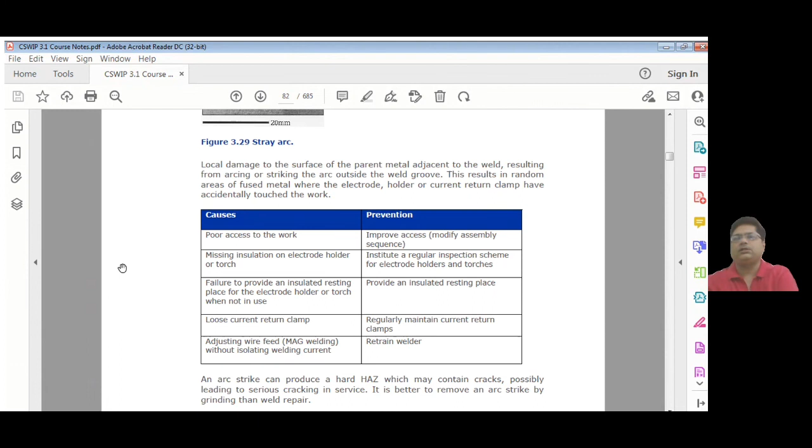सो प्लेट और इलेक्ट्रोड टच हो गया तो आर्क स्ट्राइक आ जाता है। लूज करंट रिटर्न क्लैंप, अगर आपका जो अर्थिंग क्लैंप लूज है तो वहां पे बहुत बार स्पार्क होके आर्क स्ट्राइक आ जाता है। सो एडजस्टिंग वायर फीड विदाउट आइसोलेटिंग वेल्डिंग करंट, अगर आप FCAW प्रोसेस में वायर फीडिंग वेल्डिंग करंट आइसोलेट किए बिना एडजस्ट करते रहेगा तो नेचुरली इसमें भी आने का चांस है। इससे मटेरियल वीक होगा और बार बार फेल होने का चांस है, इसलिए वो बहुत ही इंपॉर्टेंट है। आगे जाके इसका जो लॉन्ग लाइफ नहीं रहेगा प्लेट का।

स्पैटर भी बहुत कॉमन अकरेंस है, जितना आर्क स्ट्राइक कॉमन है उतना ही स्पैटर भी कॉमन है। सो वेल्डिंग इंस्पेक्टर जब पहले साइट पे आता है तो उसको आर्क स्ट्राइक, स्पैटर, पोरोसिटी नजर आता है, स्लैग नजर आता है, ये सब चीज।

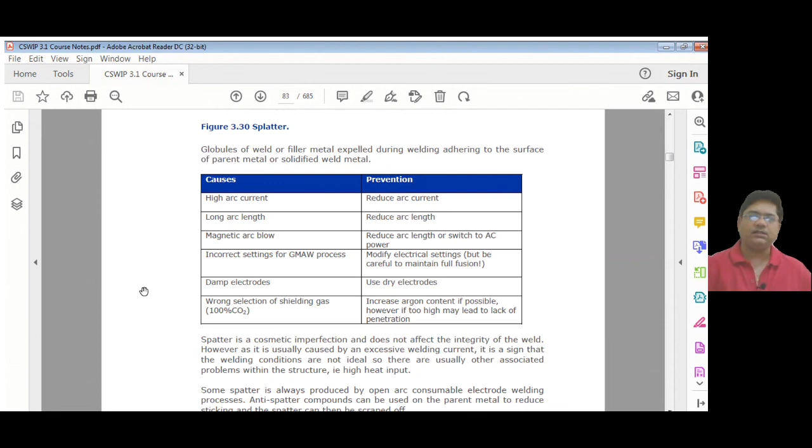स्पैटर के कारण हैं हाई आर्क करंट, लॉन्ग आर्क लेंथ, मैग्नेटिक आर्क ब्लो, फिर इनकरेक्ट सेटिंग, डैम्प इलेक्ट्रोड, रॉन्ग सिलेक्शन ऑफ शील्डिंग गैस। बहुत सारी चीज़ों से ये आ सकता है और ये कॉस्मेटिक अपीयरेंस को खराब कर सकता है। फिर दोबारा ये ग्राइंड करना पड़ता है, पूरा एरिया एमपीआई करना पड़ता है और फिर थिकनेस कम हो जाता है, इसलिए ये बहुत ही इंपॉर्टेंट है इसको अवॉइड करने का।

Torn surface, surface damage due to removal or fracture of temporary welded attachments. So welded attachment निकालने का एक तरीका है, उसको 3 mm तक गैस कटिंग से कट करना चाहिए, बाद में ग्राइंड करना चाहिए। पर आप देखिएगा बहुत बार 80% ऑफ द टाइम कोई नहीं देख रहा है तो फैब्रिकेटर और वेल्डर क्या करेगा, वो जो अटैचमेंट लगाया है उसको हैमर से मारने की कोशिश करेगा। जब हैमर से मारेगा तो उस पूरे एरिया में जो वेल्ड मेटल है वो या तो सडनली टूट जाएगा या खड्डा कर देगा, या तो फिर वो उधर एक बहुत बुरा टोर्न सरफेस छोड़ देगा।

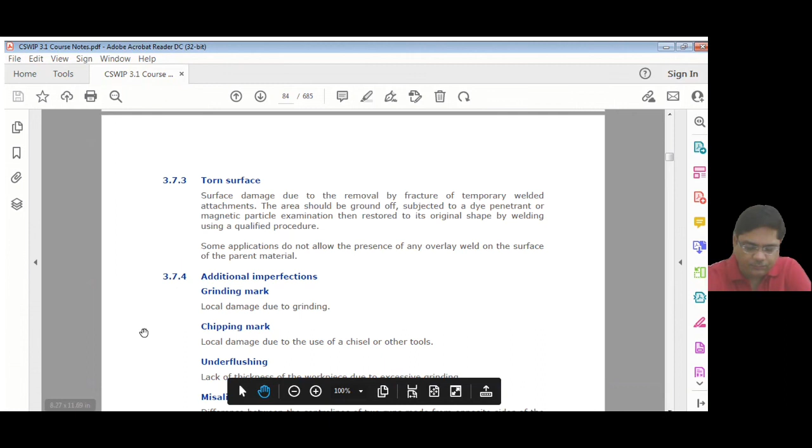ये बहुत कॉमन है होने का, इसलिए बहुत ही केयर लेना चाहिए साइट पे और बहुत ही नज़ाकत से इसको बचाना चाहिए। वेल्डर, फैब्रिकेटर सबको आपको you will have to do the constant informing them how to do it and not to do this by hammer and all that.

Additional imperfection: grinding mark, chipping mark, underflushing, misalignment of opposite runs, temper color and visible oxide film। सो ये भी बहुत कॉमन ऑकरेंस है।

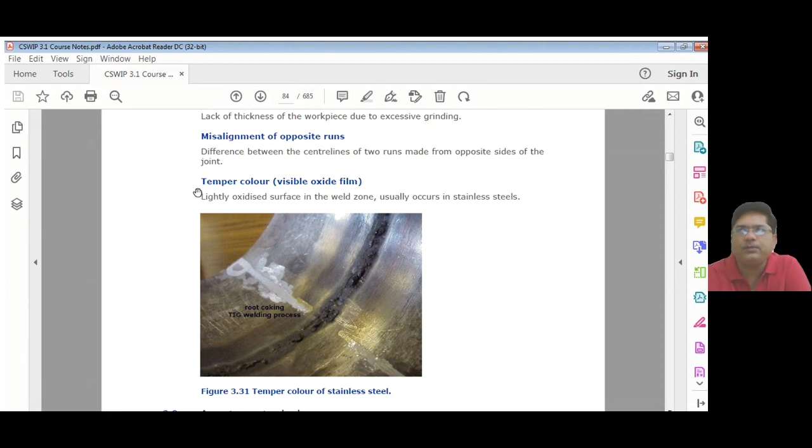So acceptance standards. Weld imperfection can seriously reduce the integrity of the weld structure prior to service of a welding joint. It is necessary to locate them using non-destructive testing examination techniques, assessing their significance and taking action to avoid their reoccurrence. So this welding, not only the welding engineer but the design engineer who designed this,